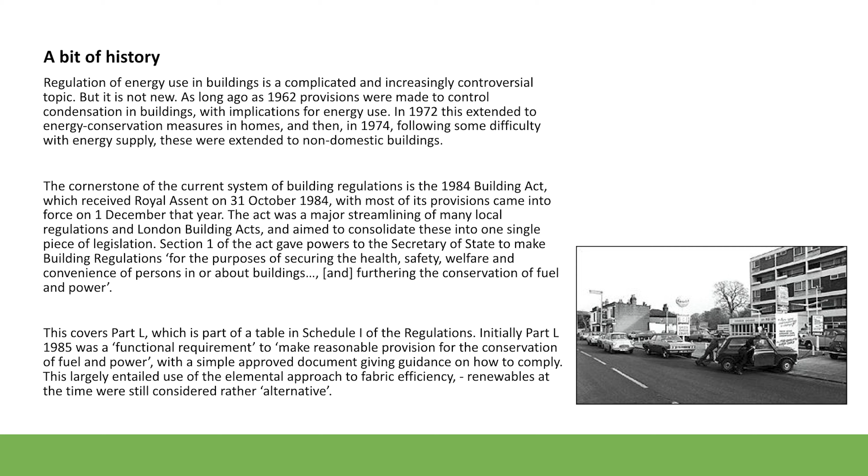It wasn't really until the 1980s that you started to see real movement in the building regulations, and that was when we saw the introduction of Part L. It was very early days in 1985 when Part L first came out. It didn't really progress much for a decade until 1995, when it was updated.

In 2002, we started to move away from energy efficiency into the concept of CO2 and emissions, rethinking what it was we were actually trying to achieve. By 2002, the approved document was split, and we started to consider both domestic and non-domestic buildings. By 2003, we'd had the Energy Performance of Buildings Directive - EU legislation setting out the move towards zero carbon.

In 2006, Part L underwent a revolution. Out went the elemental method, and in came a new piece of black box technology where, instead of just the thermal performance of the building elements, you started to look at the overall performance of the building.

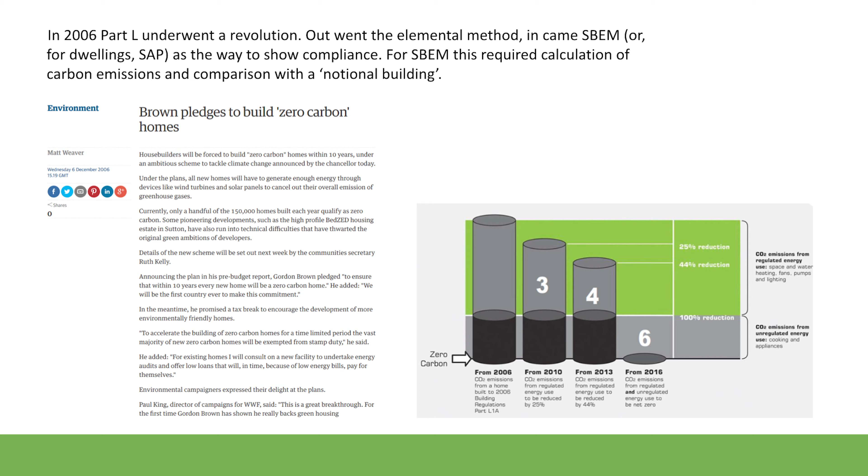And we set out an agenda back then, under Gordon Brown, to move towards zero carbon homes. We had a plan that by 2016, we'd already be starting to build these. Without getting overly political, which is difficult for me, we then had the implementation of a coalition government.

And with that coalition government came about a whole series of new agendas. The government came in with a view that regulation must be effective and should be as light touch as possible. In fact, several times they referred to it as a bonfire of the regulation. They were looking, on every occasion possible, to get out one regulation for every new regulation they brought in. So they were very much a deregulation-based government. In fact, as that progressed, it got to the point where for every regulation they brought in, they wanted to get 2 out, and so it continued.

In 2013, the government was still confirming its commitment to the zero carbon homes agenda, but it did so rather uniquely in the budget. Which is interesting, because all of a sudden it was the Treasury and not the Environment Department, or whatever we want to call them, that were actually setting the agenda going forwards. So despite the fact that Europe at that point was requiring zero energy buildings from 2019, this position was actually set out in the building regulations.

So we had a trajectory from 2013 to 2019 that would be delivering zero carbon buildings as we speak today. And that was going to have a step phase. So in 2013 we had one increment, and in 2016 we had a further increment. When it eventually came forward, the 2013 change actually came about in 2014, and when it came in, it was a much watered down version even then. So instead of having a 44% increase, we ended up with just a 6% improvement. The standards brought in for commercial buildings were just 9% across the build.

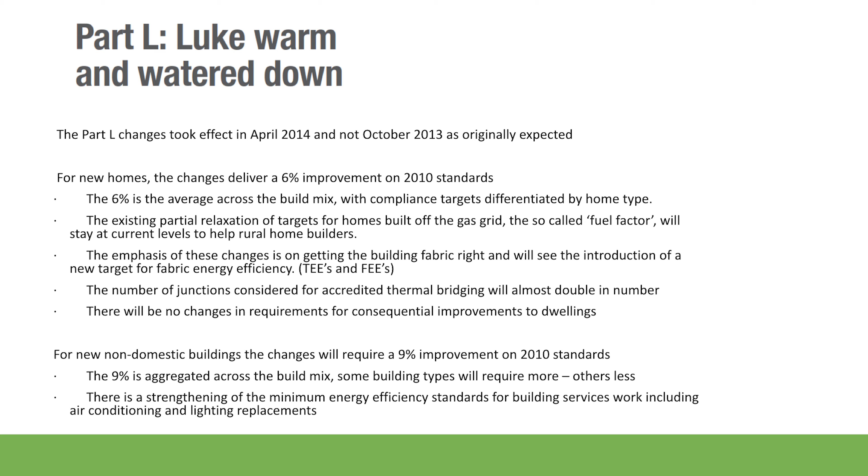What also happened was that something called the transitional provisions were implemented. Now what that meant was that if you had a building where you applied before that date, you could continue to comply with the regulations before that date. So even though the build would actually be delivered 3, 6, 9 months further on, or 3 years further on, you could still get away with having submitted your application before the new regulations, and that meant you could build out-of-date buildings as far as that was concerned.

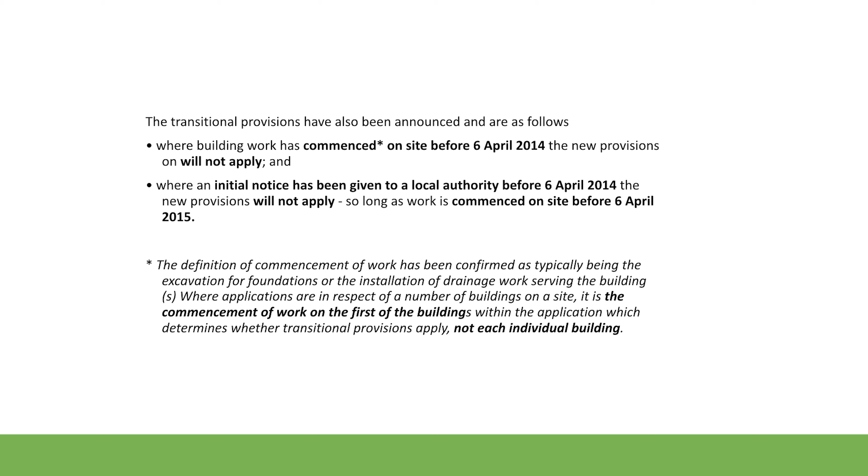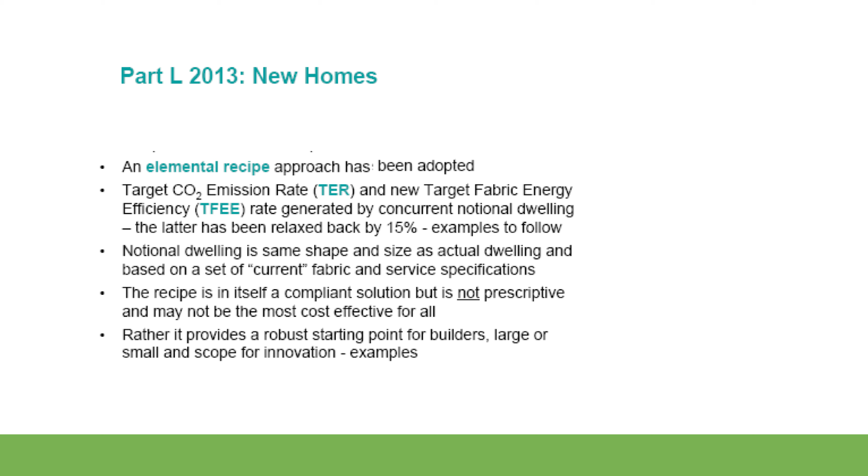The 2013 regulations brought in a new concept, a new elemental recipe, and you had far more black box technology as well. What was interesting was that it was doing nothing in terms of consequential improvements for existing building stock.

Now, why is that important? It's important because the vast majority of the emissions that we get from this country are not from the stuff that we are building as of today. It's coming from the buildings that we have already got standing as of today. So unless we tackle the existing building stock, we are not going to succeed in reducing our emissions in any way, shape or form.

Along then came the housing review, and the housing review did away with, amongst other things, the Code for Sustainable Homes. And in particular, it talked about the problems they were experiencing with planning authorities implementing higher standards of energy efficiency that were inappropriate to developments.

So what happened was all of the regulations in and around energy efficiency were taken from multiple documents and were stuck down into effectively 3 little blocks. So you had the things that the planners could do, the things that building control could do, and then a set of separate technical standards.

One of the other things that's important within this is understanding what we're talking about when we talk about zero carbon. One of the things that Mark was sort of hinting at is that when we talk about zero carbon, we're talking about effectively net zero carbon in the building, so that the energy use within the building is effectively offset in some way, because it's almost impossible to build a true zero carbon building.

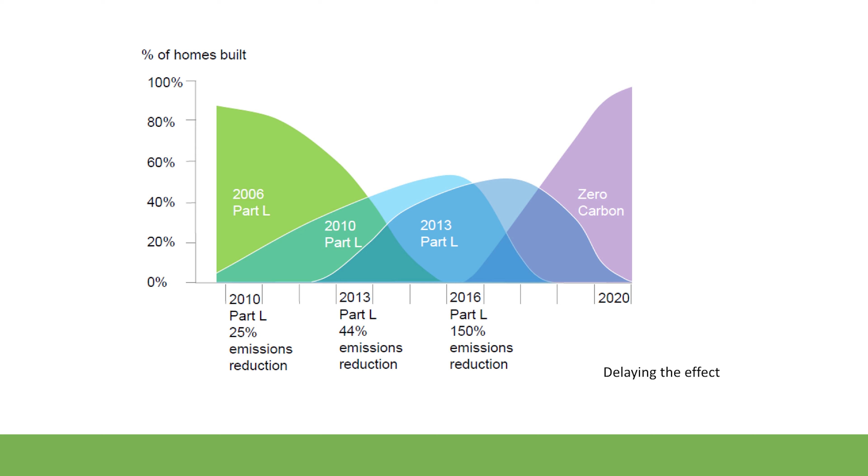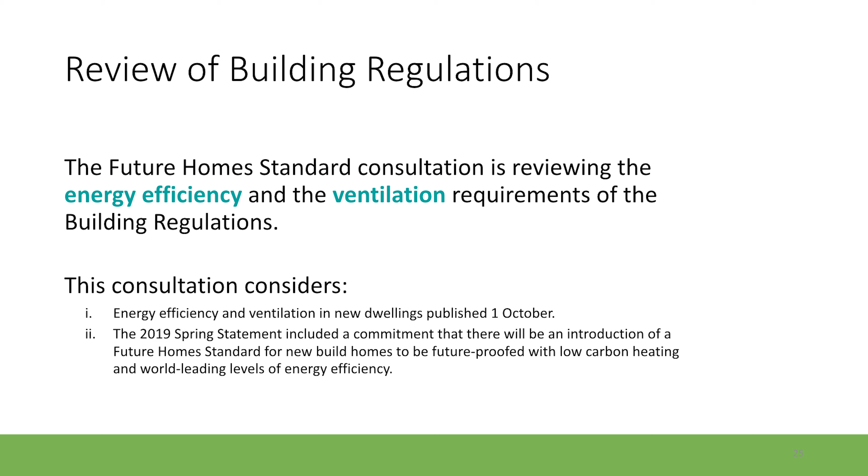So that brings me to the bit that you've actually come along for, which is the current housing standards review itself. Now this is focusing on both energy efficiency and ventilation requirements of the building regulations, in relation to dwellings as things stand at the moment. We are only dealing with dwellings at this point in time. There will be a future consultation that deals with buildings that are non-dwellings.

On the 27th of June this year, the UK became the first economy in the world to pass a net zero emissions target into law, which is something that I will actually commend the government about doing. This target will require that the UK brings down gas emissions to net zero by 2050. Even under the Gordon Brown regime, it was only effectively an 80% reduction from the 1990 target level. So this is a really significant move forward, and it is something which is really positive.

But how is that going to be delivered? What we need to bear in mind is that the new homes that we're constructing over the next 5 to 10 years will be some of those homes that exist in 2050. So we must start to make that change now.

Alongside the various pledges that are being made left, right and centre at the moment by all of the parties out there on their environmental credentials, the thing that's actually going to deliver this will be the building regulations, no matter how they attempt to go about any of the other commitments that they're making. And that will be delivered through Part L of the building regulations. So that's the bit that needs to be changed.

So when you go to the consultation document, you can take a look and see all of the things that are actually being proposed to be changed. There is a draft version of the new approved document L, and the key elements that are changing are the ones highlighted in yellow. I've stripped a page out and indicated for you some of the things that are changing. On that particular page, that's everything.

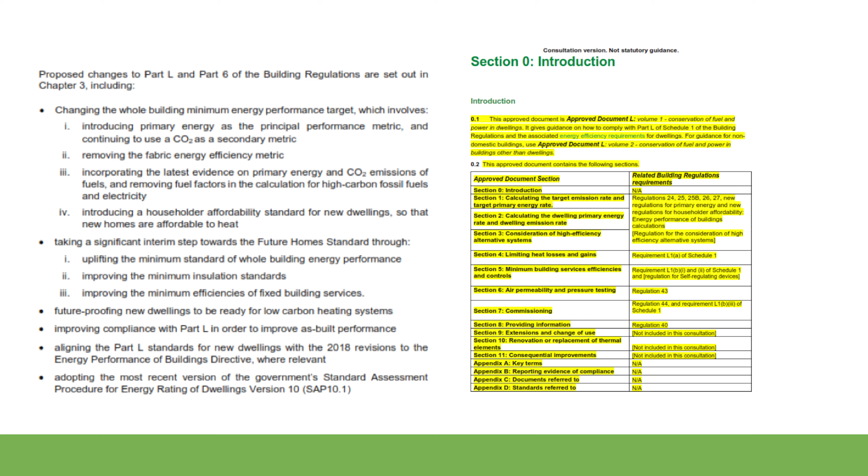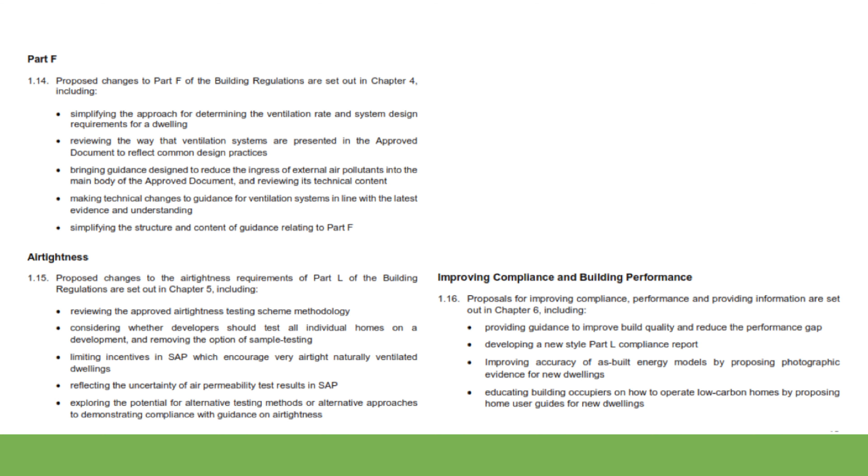We're also changing the requirements to Part F, which relates to ventilation of the building, the requirements for airtightness, and we're also improving the issue about compliance of the building fabric itself and how that is going to be delivered and how it is actually going to be inspected. So the future home standard will still require very high standards of fabric compliance. It will mean that every new home effectively will need to have triple glazing and the highest practical standards for walls, floors and roofs to ensure that we get as little heat loss through those as possible.

Geoff, I take it fabric means the stuff that goes... Sorry, it's not the cloth that you stick on your ground. No, it's not, sorry. When we're talking fabric here, we're talking the building fabric, which is the brick walls, it's the roof, it's the floor.

And by reducing the demand for heat, we will also move forwards. Now, what does this mean in practical terms? It means in practical terms, we've got to move away from providing boilers in buildings.

So our traditional gas boiler is effectively going to be redundant over the course of the next 5 to 10 years as we start to develop these out. So this is going to be one of the key changes that you're actually going to see. You're going to see the installation of heat pumps or district heat networks as being the core way in which you get buildings to comply under the new regulations.

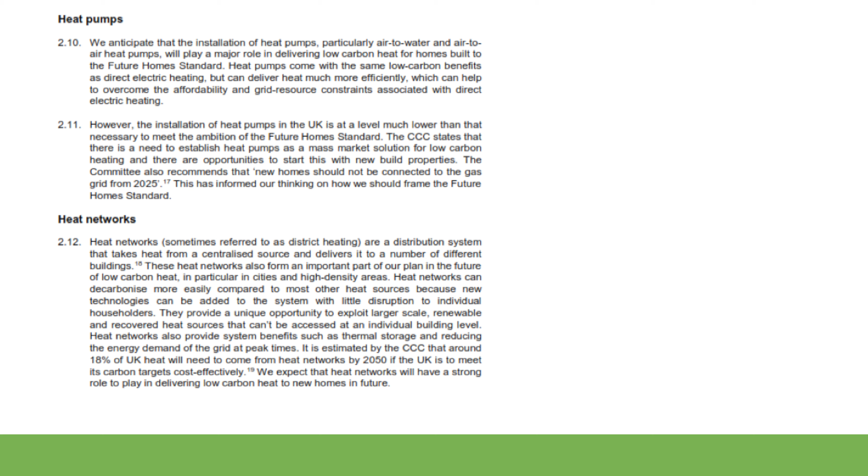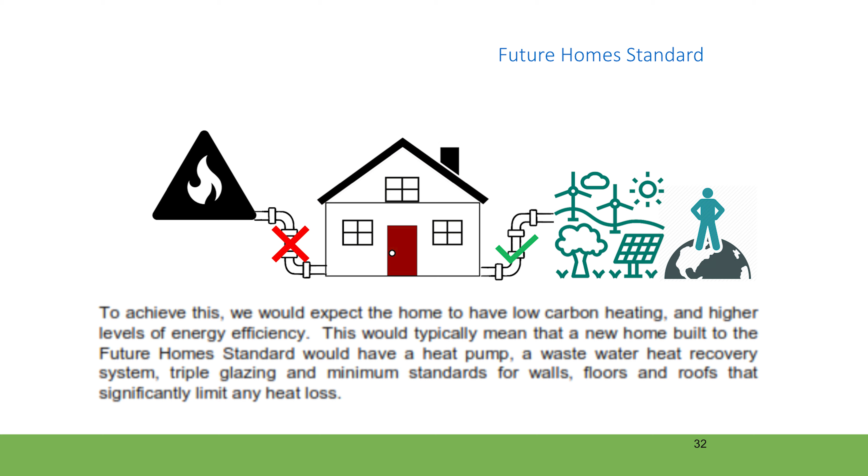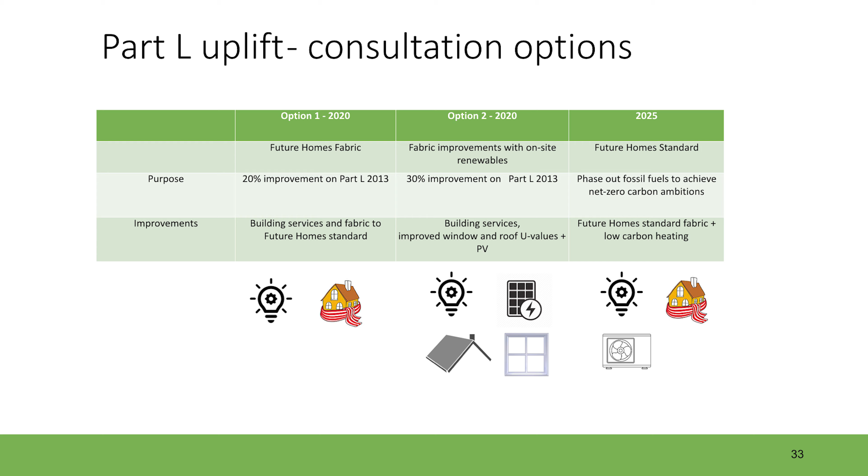Now, these come with some costs. So let me just run you through as they stand at the moment. The proposal at the moment is that in 2020, that's next year, there'll be a 20% improvement on the Part L 2013 requirements, which essentially is just what we originally said we would be doing back in 2016. Alternatively, there's an option in the consultation for a 30% improvement and the introduction of requirements for on-site renewables. And by the time we get to 2025, the idea will be that we will have completely phased out the requirement for fossil fuel supply to our new buildings.

As I say, these come with costs. So the suggestion as it stands at the moment is that if we start with the base version, you're going to be looking at something like a capital cost increase of £2,500. And if we go for the 30% increase, you're going to be looking at about £4,500 to £5,000 increase in costs. However, these will be offset in part by the operational costs of the building as you go forwards. So there will be a payback over a period of time for this.

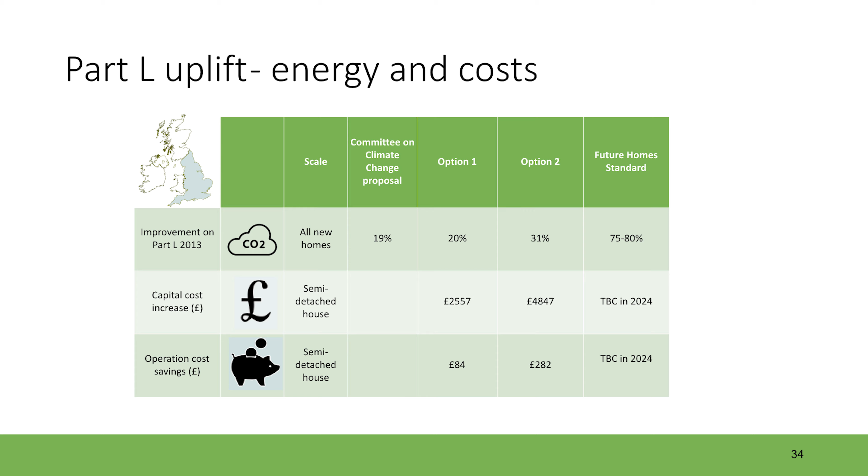Some of you will really be interested in the fabric requirements, which mean the U values of the various bits and pieces, the walls, the roofs, etc. One of the interesting things about the discussion is that the Part L 2020 suggestion for option 2 actually maintains a number of the existing U values that you've already got. Because one of the things that we've discovered is that there is a very low rate of return on increasing the thickness of walls and insulation. There's only so far that you can practically go with it. Otherwise you end up with walls that are 5 foot thick in order to get to the point that you're going to get any further improvement in the heat loss through it. So there's only so far that you can actually go with that.

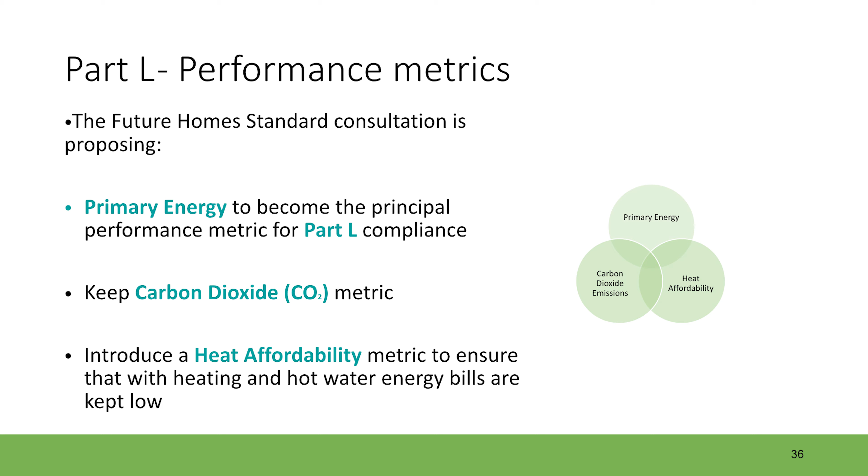So, as I've said, what we're looking to do is to ensure that primary energy will become the new performance metric, and alongside that, heat affordability will be introduced into the new guidance documents themselves. The fabric efficiency will improve, and alongside that, you've got the airtightness requirements.

Now, for those of you that are not used to the details of how this all works, the more airtight the building is, the less heat is lost as a result of it. The problem with that is that the less air that's circulating around in the building, the less air there is to breathe, and the more noxious that air becomes over a period of time. So what the new guidance is going to do is divide it down into naturally ventilated buildings and mechanically ventilated buildings. Some of the guidance that already exists about passive ventilation has actually been removed from this guidance document.

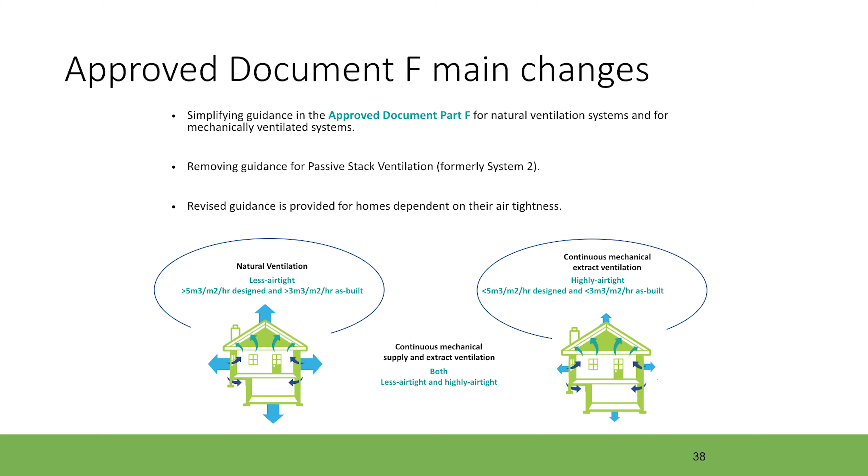There is also going to be increased guidance on the ingress of external pollutants into the building. So that's both air going out and guidance about noxious stuff coming in.

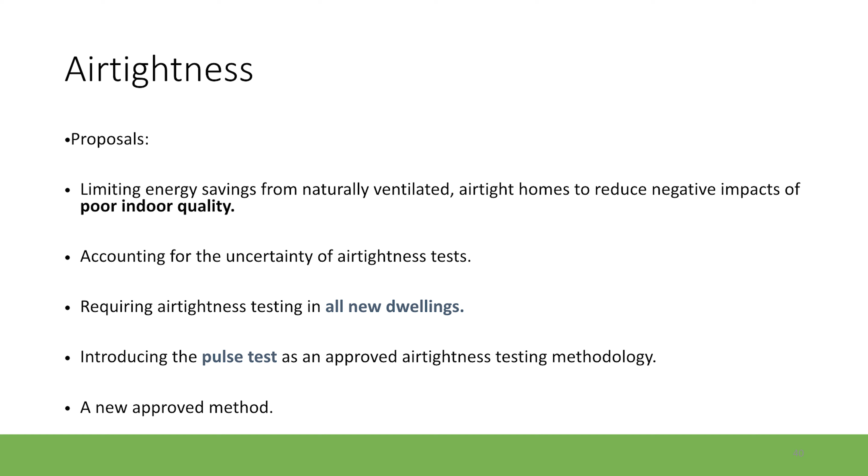So what are we looking to do? We're looking to ensure that all buildings have this airtightness test, that the requirement will be that the airtightness requirement will drop from the current 10 air changes in effect down to 5 and lower beyond that. As a result of that, we need to ensure that the ventilation requirements are upped to match that, to ensure that the air that you breathe within those buildings is adequate. There will also be something called a pulse test, which will be the new way in which you actually test the building to ensure that you're getting the airtightness requirements that are necessary.

But perhaps one of the most important parts to this is about ensuring the information flow, and that what is designed is actually delivered on site, because that's one of the major aspects that we've got as an issue.

Going forward, there is going to be an additional requirement for photographic evidence of the insulation actually in place, being submitted to building control, being sent through to the person who performs the calculation, and being on record for the homeowner. Why is this important?

It's important because at the moment, what often happens is that the insulation in buildings is covered up without anyone actually seeing it. The builder will make a self-declaration of what was put in, including all of the energy performance of boilers and any other heating, the controls, the pipework insulation, etc. that's gone into the building. So they will have self-declared that.

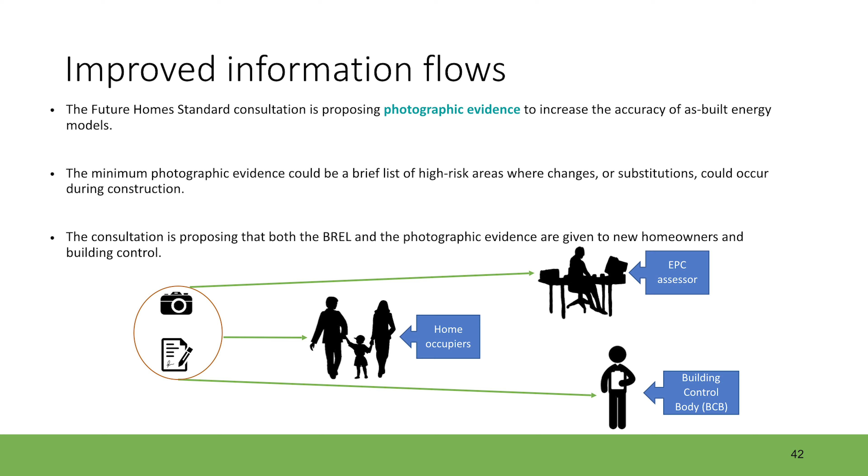Another interesting aspect to this is that at the moment, the planning department drives a lot of the sustainable construction issues. As a result of these changes, it will no longer be relevant for planning permissions to deal with energy efficiency as part of that planning consent. It will be solely down to building control and the building regulations to deliver on that.

So the Planning and Energy Act 2008 will be looked at, and they will be removing the ability of local authorities to put in requirements for energy efficiency in planning consents going forward.

Now, I mentioned that one of the issues with previous regulations was the ability of a contractor to put in an application for 2,000 housing units today, avoid the need to comply with the current standard or the future standards, and then build those houses out over a period of, say, 7 years.

Under the proposed transitional arrangements, it will be for each individual building. So if that individual building hasn't started on site, that building will have to comply with the regulations in place at the date the individual building has started. That is one of the ways in which the government is looking to tackle the issue of contractors effectively banking up approvals on a number of these buildings.

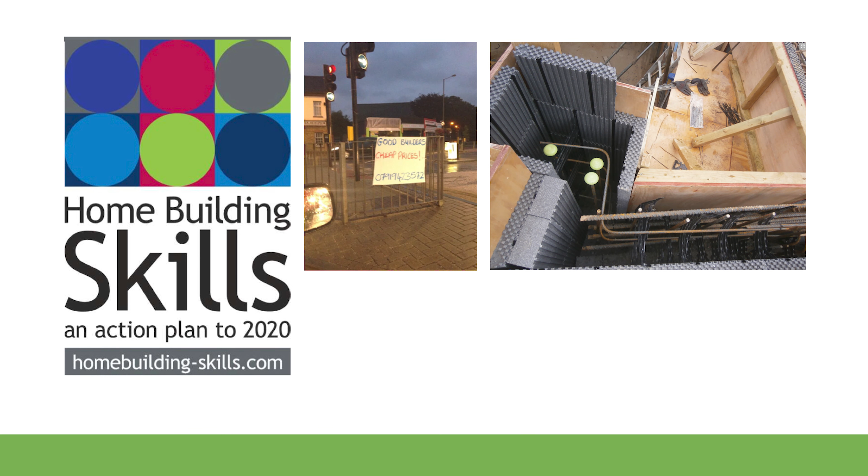This is also going to present a real challenge as we move forward. I don't know if you can see the top slide, but this is basically the typical way the UK homeowner purchases their building work: from a sign stuck to a railing outside a pub - good builders, cheap prices, ring me on 079.

We cannot continue to build in the way we currently build. We need to change the skill set of the construction industry. It's going to mean things like insulated concrete formwork, as an example. It's going to mean major changes in the way we develop, whether off-site or otherwise. So there are some real challenges in bringing up our workforce to deliver on these low carbon promises we're making.